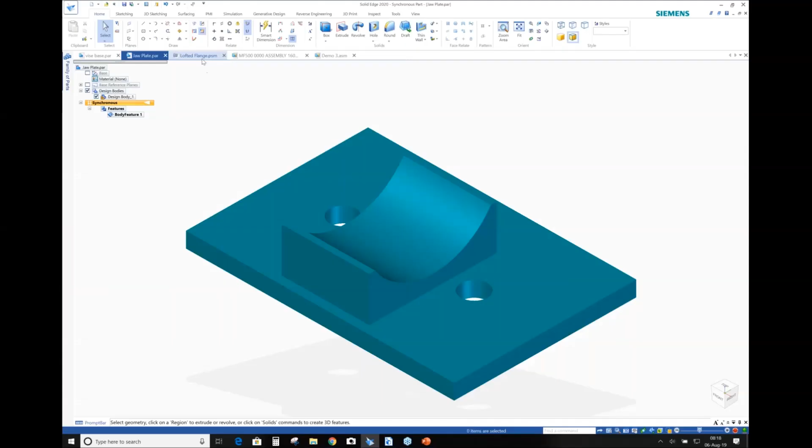Moving into sheet metal, okay? Now, this is what's interesting. We have a new process in a command that has become more and more popular. And so for those of you that are sheet metal centric, and you're probably quite familiar with this, notice that I transferred from synchronous into ordered.

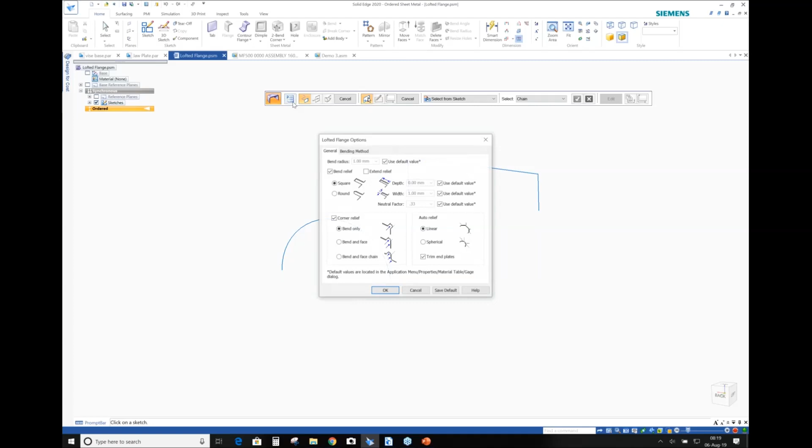That is because the command that's been enhanced is called the lofted flange. And the lofted flange, which is ordered, is profile dependent, hence it is an ordered feature. And so notice effortlessly we switch back and forth a little bit. What is new or enhanced with the lofted flange is we have a new bending method, okay? And that bending method is meant to improve with great accuracy the flat pattern development on non-uniform bends.

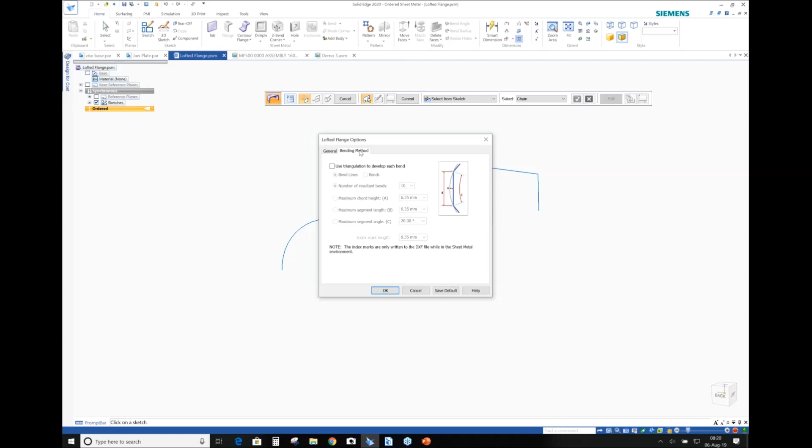So most of you are probably doing tabs and flanges or contour flanges and so forth, and you might have some angle to your flanges or maybe not, and those are as always pretty straightforward and very predictable, and after a little time you can get a flat pattern that is geared very much towards your press or towards your machinery, with decent or acceptable accuracy. For those non-uniform type situations like a lofted flange, we'll do something called use triangulation to develop the bends.

Let me demonstrate. So in this situation, I simply want to say, well, I'm going to go from this profile, accept. Everybody forgets to accept. Don't pick both. Pick one and accept.

There, a little bit of free training right there. See, makes today worth it.

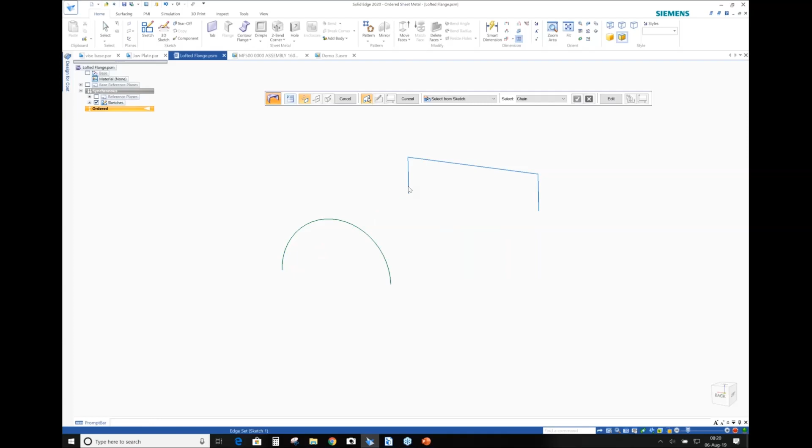Then we pick the second, and you'll notice that it shoots a point to point, okay? Those are called vertex maps. And you can add vertex maps, the more difficult. Remember, this is sheet metal. Sheet metal doesn't morph, okay? This is not plastic. This is not a machine part. This is not a forge or anything like that. Sheet metal bends, and that's about it. It bends and stretches and compresses in a very rigid fashion. So we have to account for that and try and give you a little bit of flexibility.

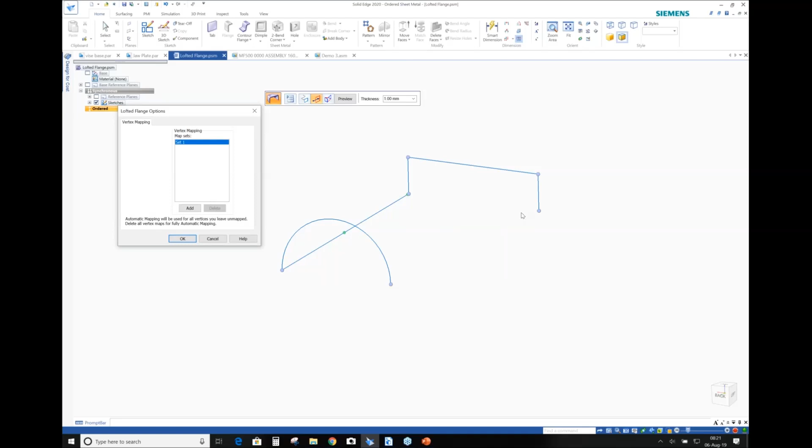So with that, they introduce vertex maps, where you can set up point-to-point maps and add greater predictability to your end result. We'll take that material to the inside of our shape. And for those of you that might have done this in the past, you'll notice that it is a little bit more involved, yes, but it is far more realistic, because to make a shape like that, it has to be fed, bent, fed, bent, fed, bent, etc., unless it is rolled on a special tool. There again, to get the flat pattern correct, you're going to have the right information in what you're seeing here in this lofted feature. With that came a new bend table.

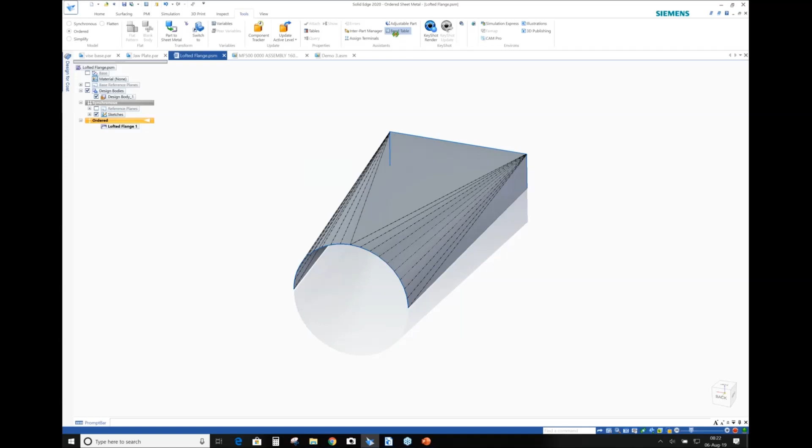And the bend table, which is very centric to what we just did, is fairly involved. Okay, back in the day, it was one bend of a total angle. Now we have angle and included angles, okay? The flip side angle, if you will. And also we're tied to which particular bend. This is very important for anybody that has actually bent metal and fabricated metal, which yours truly did at a much, much younger age to get himself through school. We're going back in time on y'all.

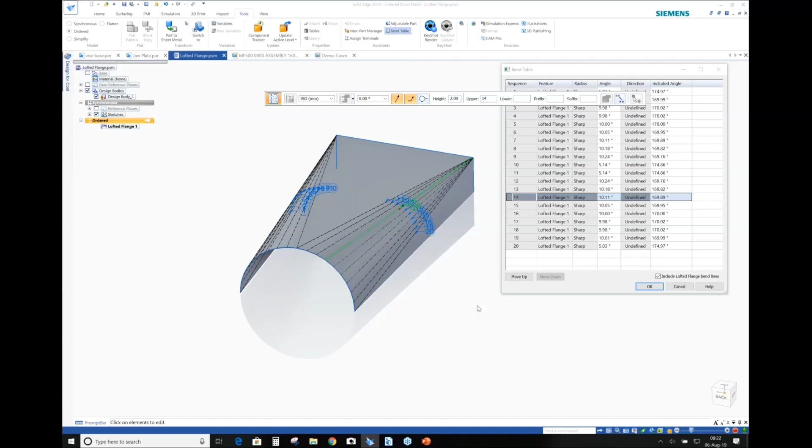So there are certain bends that are more problematic than others. And now we can break this down and decipher each bend, and you'll notice picking an entry is going to highlight where that entry is on your model, and you can actually then work that single entry with great accuracy versus the old days when it basically just created one non-uniform bend and you had to work with it from that point. So a nice addition, I believe, in the sheet metal world here, okay?

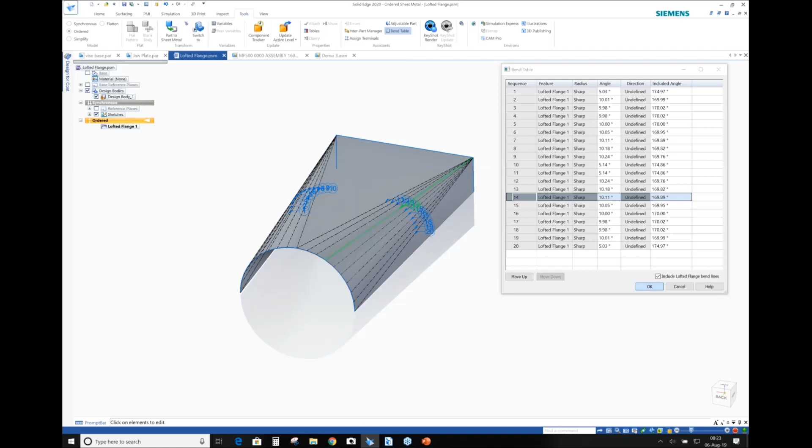So I'll hit OK here. I'll accept what it has built for me. A lot of folks wonder about, well, what are we doing with that? Well, actually, you're always in sheet metal. It's an open piece. This would actually be brought in and mirrored over.

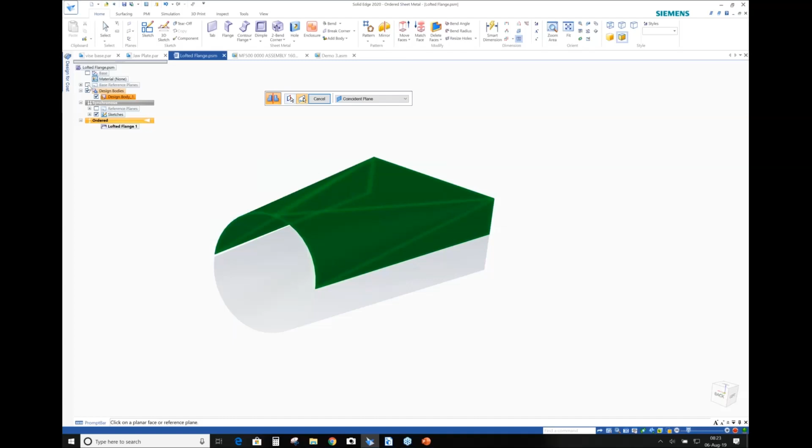You'd mirror copy a part, and we would mirror the entire body, for instance, and we would do something pretty nifty like say, well, what I'm going to do is mirror that with a little gap, because I'm either going to weld or spot weld or put some seams or mounting tabs in there. So I'm going to give myself just a little bit of breathing room and say I want to mirror that down and probably put a seam in there, something like that.

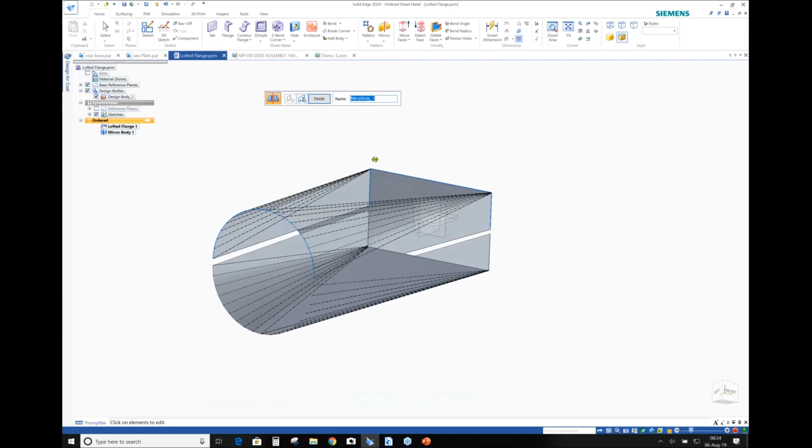That's a more generous seam, but you get the idea of what we're trying to do, and then decide how you're going to adhere those, if not slip fits or notches or something like that. At any rate, a lot of people ask, well, you only built half of it. Yes, I'm going to let the system build the rest here for me, and then pull flanges off for mounting and so on, okay, from there.

So the first question, I'm sure everybody who does sheet metal is saying, you got to unfold that, right? How does it unfold? What does it look like? Well, you're right. I do have to unfold that. So real quick, let's go into tools and we'll flatten that out. Okay. Now, for those of you that are not typically doing any flat patterns, or you are, be advised that the flat pattern treatments are here. This is a major time saver, right?

Outside and inside corner treatments, whether it's for safety or ergonomics, sometimes you got to go ahead and break those corners, and instead of you picking every corner on there and saying chamfer, chamfer, chamfer, and so on, let the system do that for you as it's creating the flat where it counts, because it's that flat that you're going to nest and cut, and that's where those breaks are going to happen on the corners. So there's a little bit of automation built in for you.

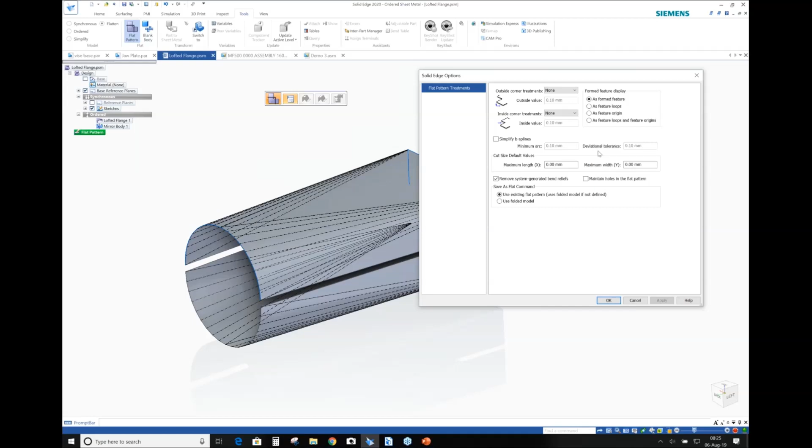There's also cut size defaults, and the reason I'm talking about this is that later, before we wrap up, I'll be able to show you a little about the new nesting product that has come out with 2020, I should say, pardon me. And with that, our cut size default values, a max and a min, max in the X and the Y, become very important, because the amount of pieces you can nest in one sheet in one run has some serious cost advantages to it. So this is sort of a seed bit of information that leads us into the nesting process.

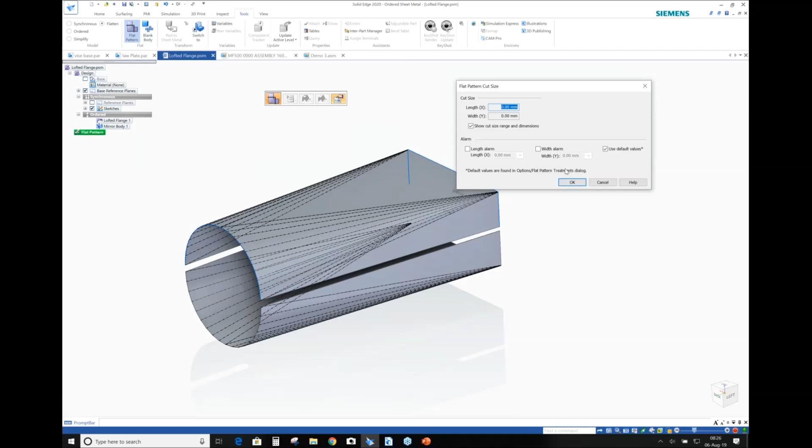Furthermore on that, and this is not new, but it is very important, we can actually set an alarm if we exceed a given length and a width on the cut size. We can pop up an alarm if you would violate your own design criteria in the flat without even having it flat. You can set this up and work on the formed model, and it would tell you, hey, in the flat, that's going to exceed your own criteria. So very handy. Good stuff there for you.

So we would pick on, I'm going to flip this around and pop that. Then you'll notice, whoops, my bad here. That's the mirror. I'll move on, but I'll come back if anybody's totally interested in that, and we'll flatten that out, remove the mirror, and so on. I'm sure that is what's bothering that.